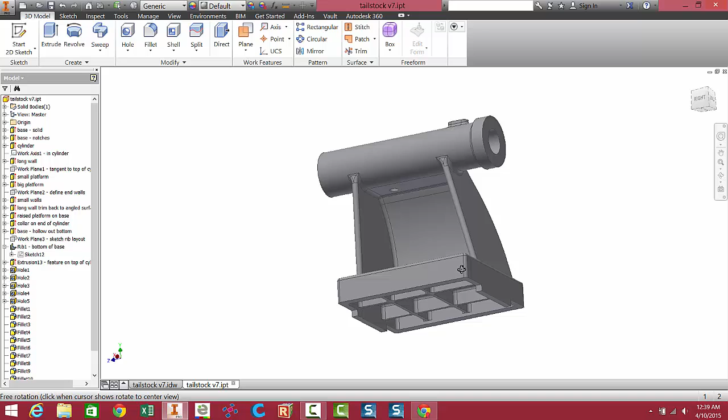This is going to be a real quick overview of the Tailstock version 7 part. First, let's take a quick look at this part in 3D orbit. Now you can see some of the features.

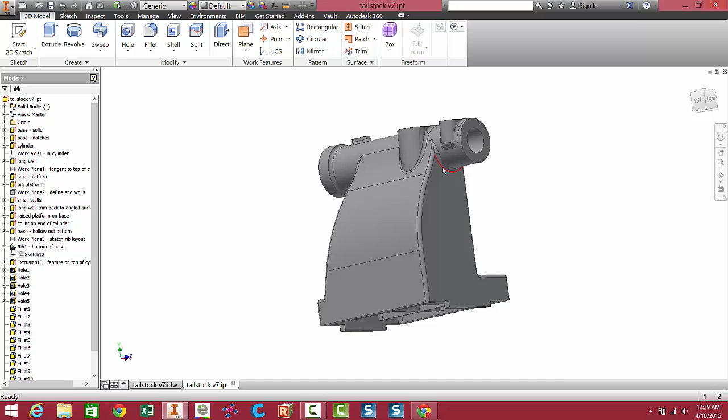A bit closer up view of those two platforms to the side of the cylinder. Just like that. So let me now simply rewind the part so you guys can see the order I made everything in.

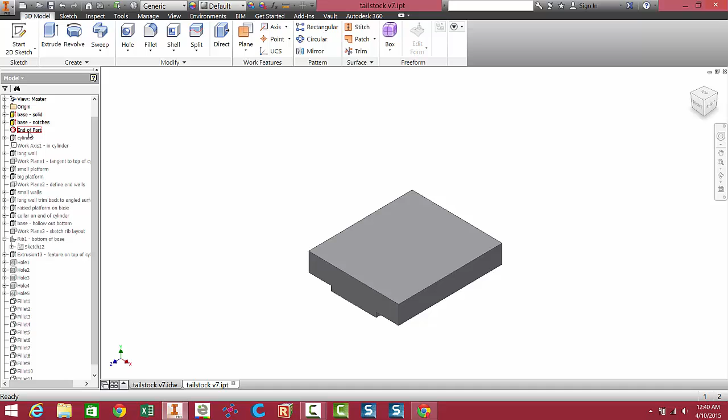I started just with the base, real simple. Then I cut away at the base to create those notches. Then next was the cylinder way up top. The cylinder was created by sketching on this end surface and then doing an asymmetrical extrusion.

Then I placed a work axis down the cylinder. Referencing the center of the cylinder will come in very handy in other sketches. A work axis is done by going up on the ribbon and clicking on the cylinder, and that'll put a line right down the middle.

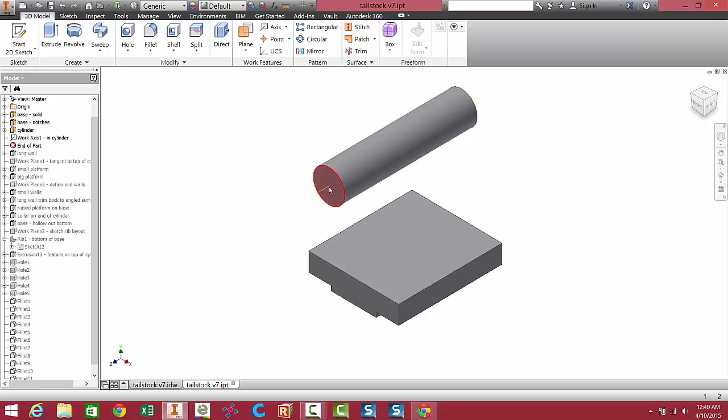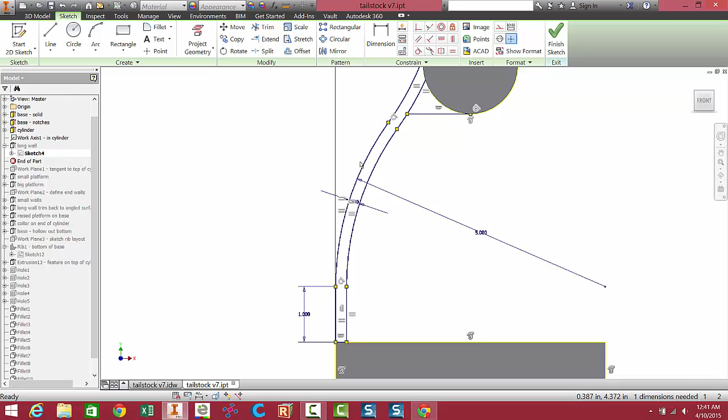Then next we created the long wall, and that was with a sketch on the end of the base. Do the left side first. Let me F7 so I can slice it. Yep, do the left side first.

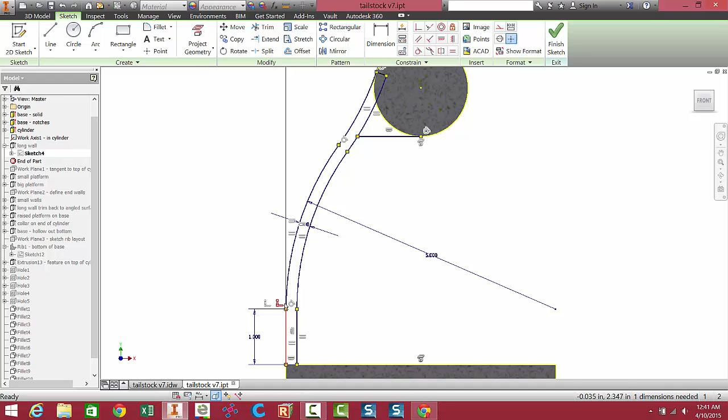Offset over to the right, close off the end with a little line. Make note it's tangent. This left line is a straight vertical line, an arc to the right, and then an arc to the left with tangent at all those points. Then offset to the right, and don't forget to put this little horizontal line that's tangent from the bottom of the circle and just comes over here to that intersection.

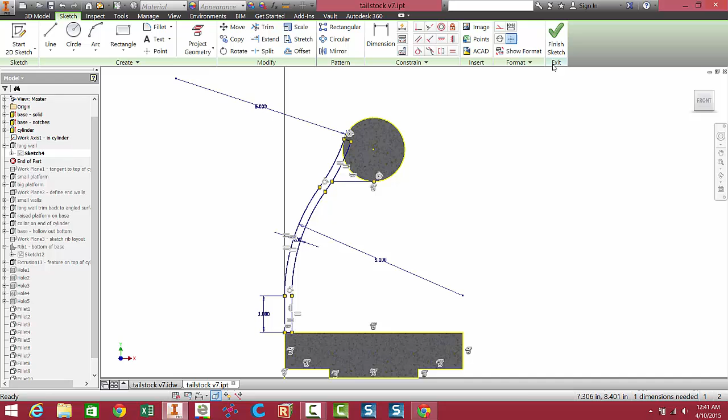And then we just extrude it to the other end of the base. I put a work plane in on top that's tangent to the top of the cylinder.

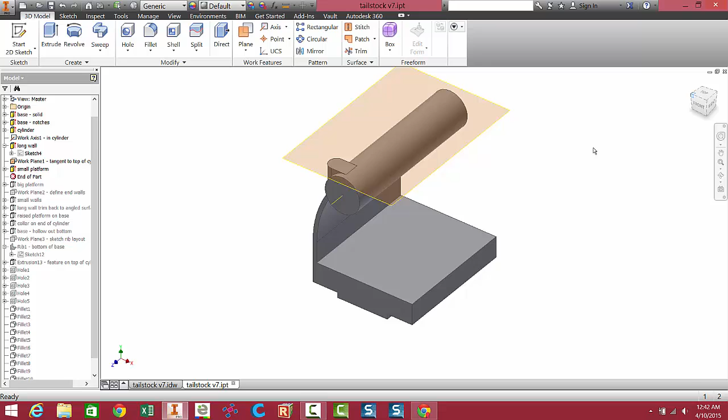Then I start creating these little platforms that come off to the side here. See that one? Just an example of what the sketch might look like for that. There it is. So we have how far out the center point is, how far in on the cylinder it is, and what the radius is.

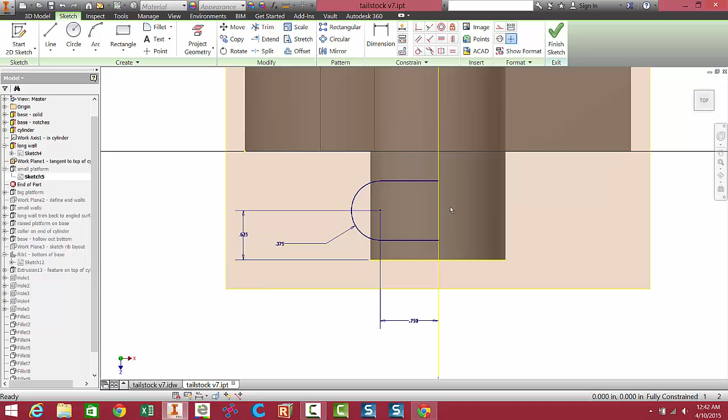And again, this sketch is tangent to the top of the cylinder because that's where the work plane is. And then we just simply extrude it down along the side. Next we'll do the bigger platform, and that just extrudes to the next feature, just blends in there.

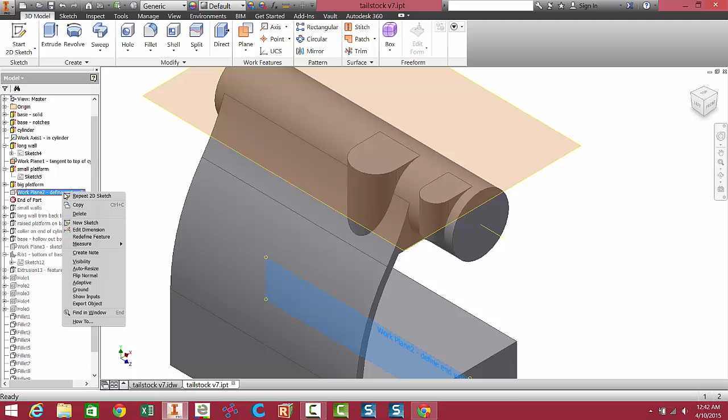We're going to place another work plane down here on the base, and that is so we can sketch on that and create these two smaller walls, and they have sketches that look like this. We hit F7.

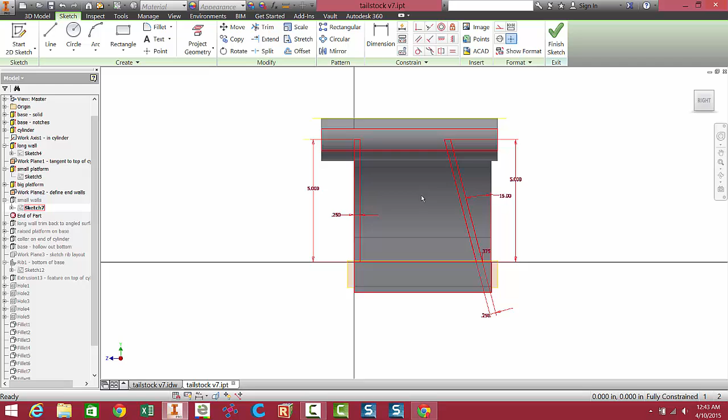Special thing to note on this is when you're drawing these rectangles, go up inside the solid part of the cylinder. That way we get them to blend together correctly. Same thing here. This side I think I drew with a rectangle tool. This side I had to use the line tool and then just use parallel to get these two lines parallel.

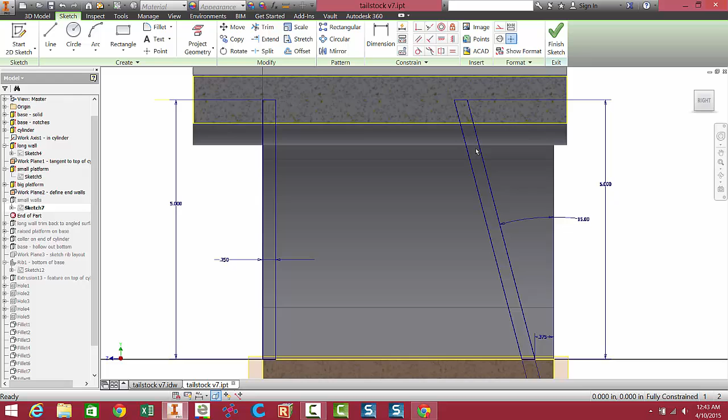The distances I just put in there to make sure the height was controlled and never shortened up on me. Also note down here how far in the wall is from the end. And this side is also 1/4 inch thick.

And then once you get them drawn, you just extrude back to the next feature. What I mean by that, just making sure right there it says to next. It should just extrude, that way you get a nice junction between the curved wall and these straight walls that you're adding.

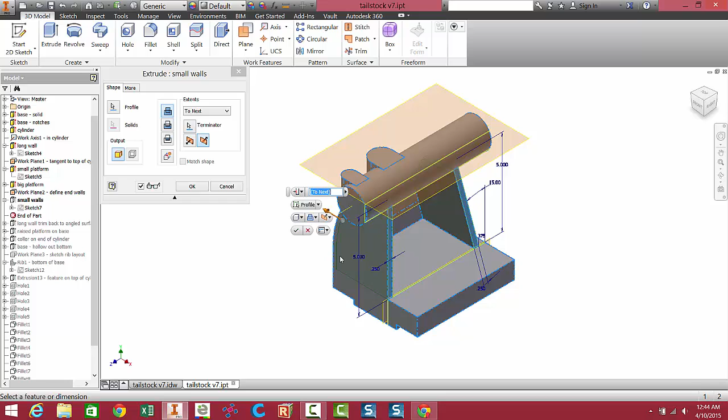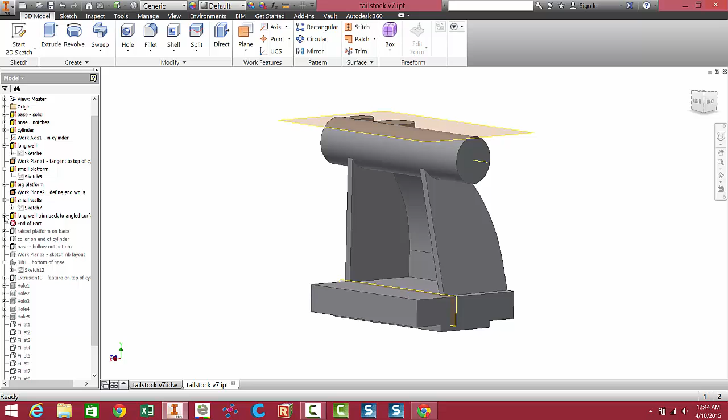Then next we need to trim off this overhang back here, like that. And to do that, you actually just put a sketch on the end of this surface here. And once you do, all you have to draw is this little line down at the bottom to connect to close this profile in.

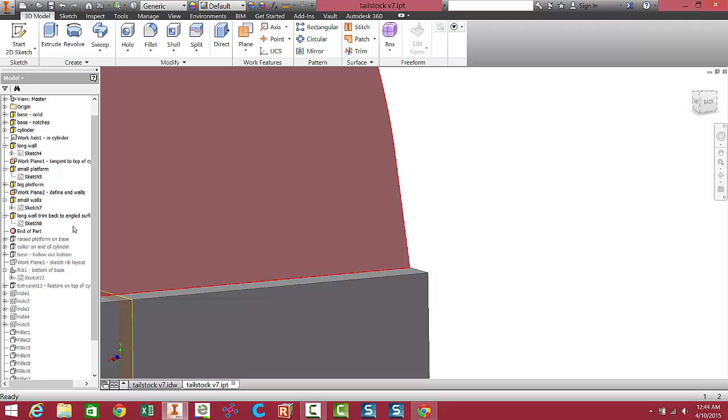And then you do an extrude cut to, and you have to select, when you say To here, you actually have to select that angled surface so it knows how far to extrude cut in. It'll just follow that surface then to cut away at an angle like that.

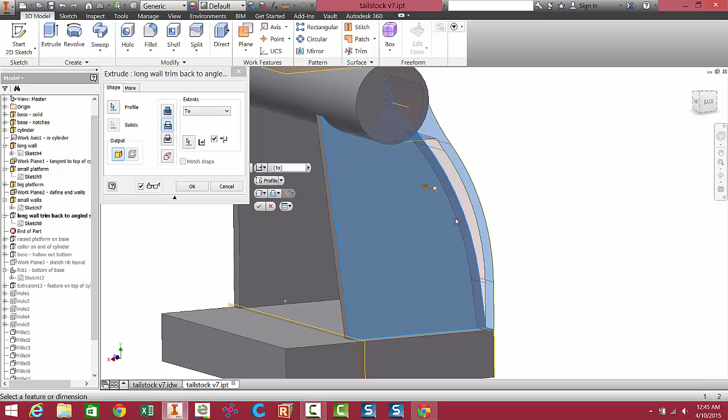Let's get back to a little easier features. We're going to drop a raised platform on the base there. Just sketch right on the top surface, extrude up.

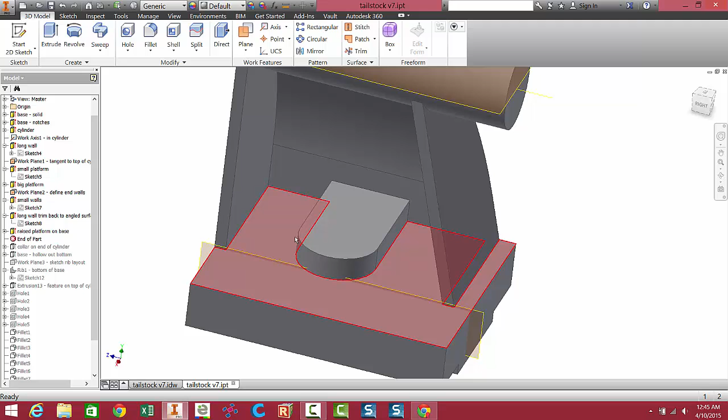Collar on the end of the cylinder. Let me shut this back off for the moment. So what I did there, in case we missed it, the cylinder's all one size.

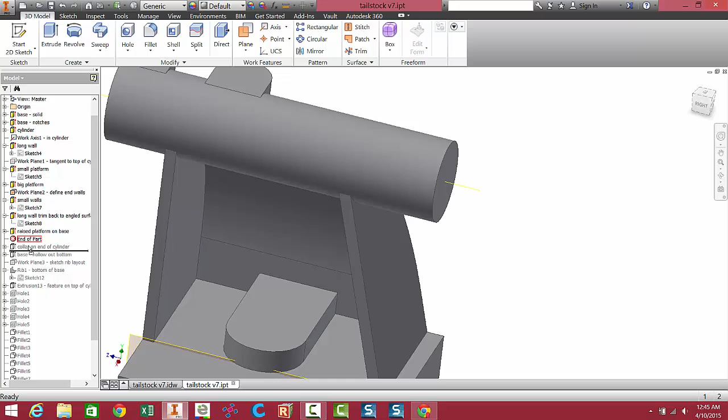We sketch on the end of the cylinder, add another ring a little bit bigger, and thicken it down there. Then we're going to work on the bottom a little bit. Need to hollow that out, so create a rectangle shape with the proper wall thicknesses, extrude up in.

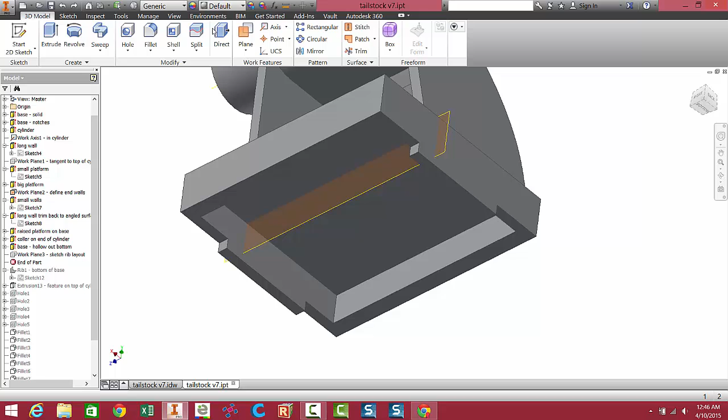We add a work plane. I used the plane tool, so I'll demonstrate that actually. Plane tool, left click hold, drag it down, and you'll see how that's coming down from the ceiling of that hollowed out area.

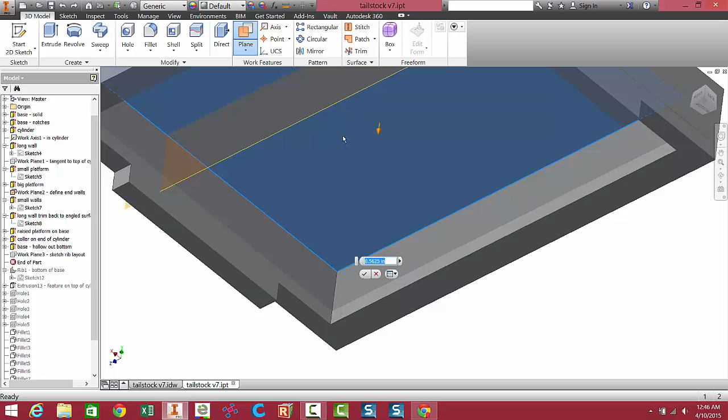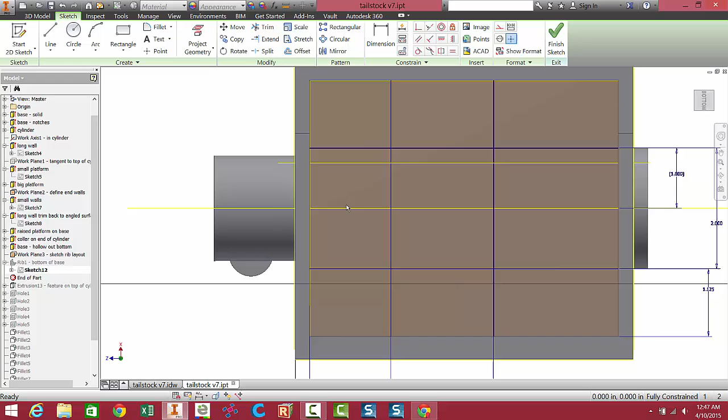Then look for the appropriate distance measurement on your drawing. This is not the appropriate distance at the moment. Once you have that work plane placed, a little bit of discoloration so we can see about how far down my work plane is. We are going to put a sketch with just simple 2 lines horizontally, 2 lines vertically.

You can probably see all my dimensions right there. And then use the actual rib tool to create the ribbed area for structure and strength here underneath.

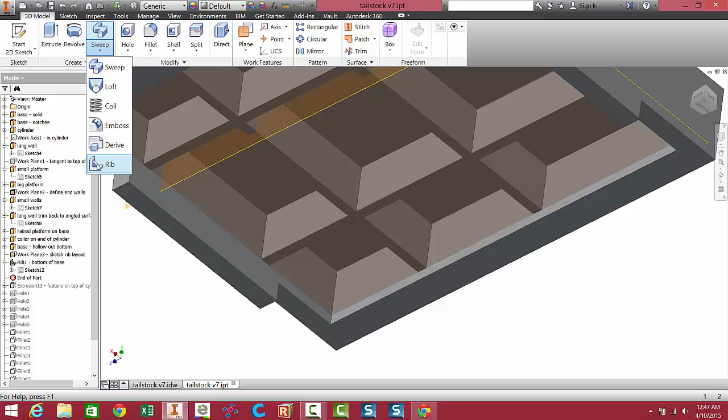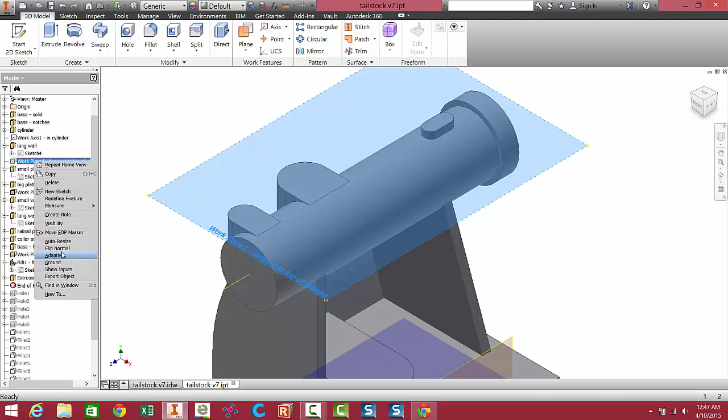Let's see, after that, a little feature on top here had to be put in, and that was by actually turning back on my first work plane that was tangent to the top of the cylinder. I could sketch on this, drew that slot shape, extruded a little bit down, appropriate distance up.

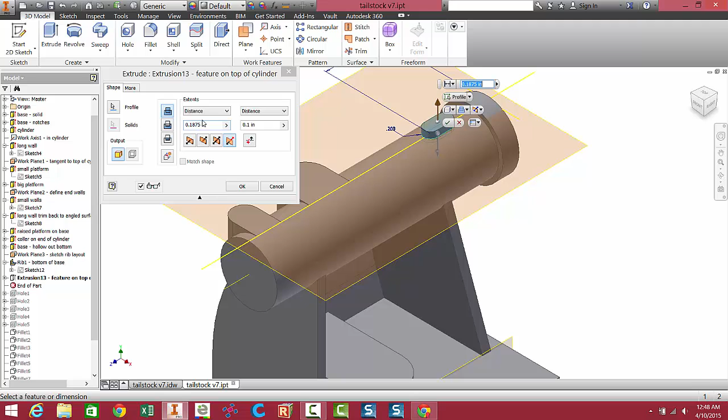Pretty sure it was asymmetrical. It was. So the 0.1 down is just to make sure there's something joining the cylinder below, and the 0.1875 up is the actual distance up we want.

Shut that back off. Shut off some of these work planes for the moment. Right there. Shut off that work axis.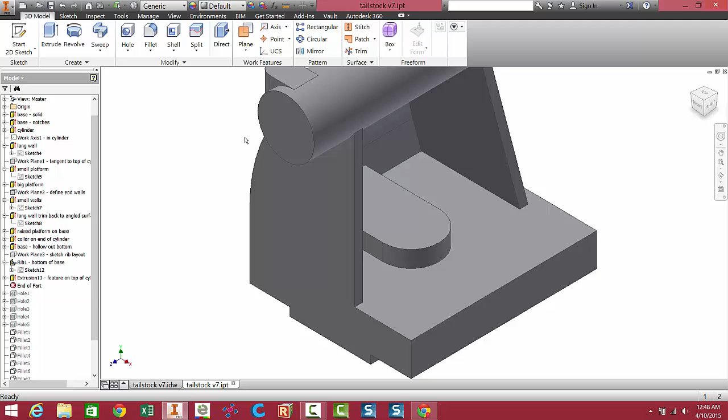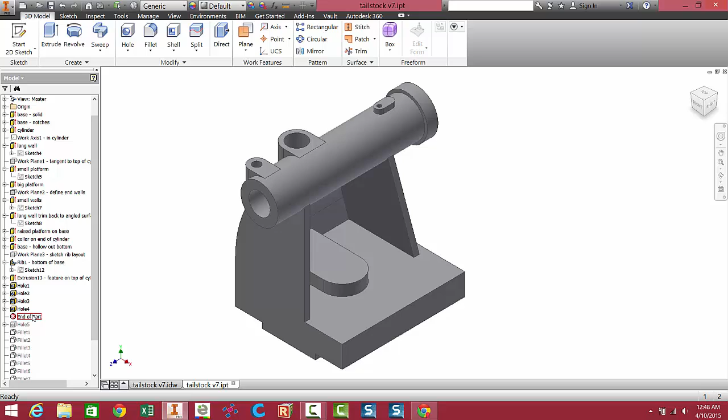Okay, once I have the solid part done, now you can start looking at adding holes that go through the parts or the features. There's that one, and there's 5 holes that have to be done: 1 on the cylinder, 2, 3, 4, and 5 down here below.

And after that, it is a lot of fillets. So I'll hover here for a minute so you can see all the highlights. Maybe I can rotate that a little bit better. Hover again — that was my first group of fillets.

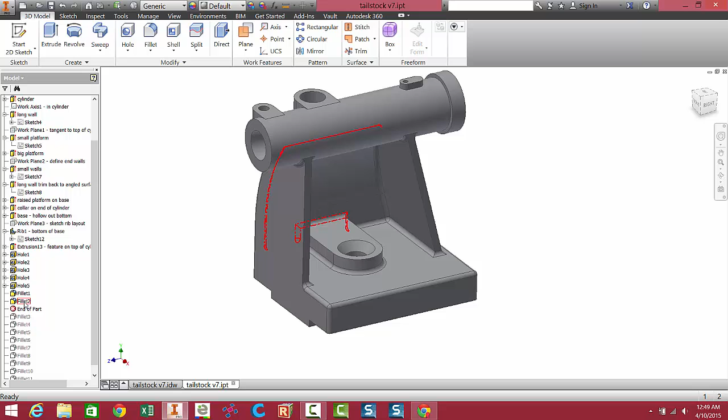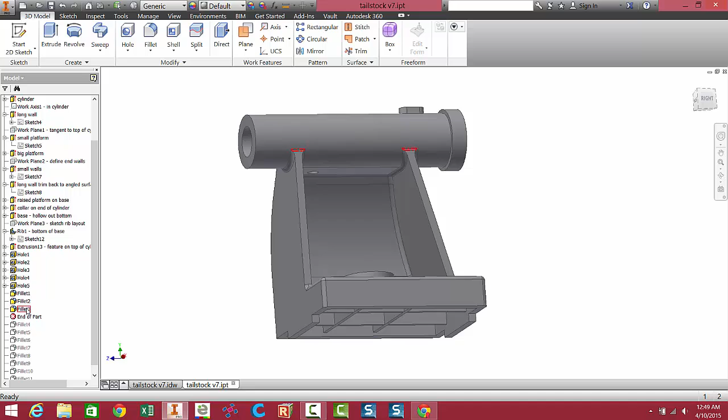Here's my second group of fillets. I'll try to turn that. And then third group, just those two little front ones. Don't forget you can pause this anytime to look at that more closely. There's lots of fillets on this. And then on the front, kind of rolling the end over. By the way, all fillets are 1/8 of an inch, 0.125.

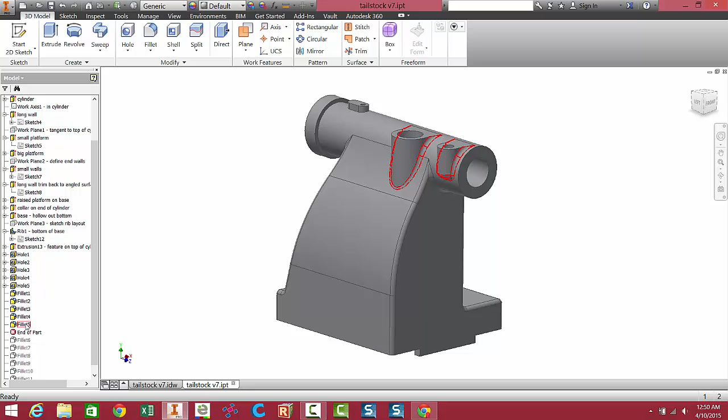Let's see, next group: back on the small platforms over here, so we're going to fillet those edges. Fillet around that feature on the very top, just where it meets the cylinder.

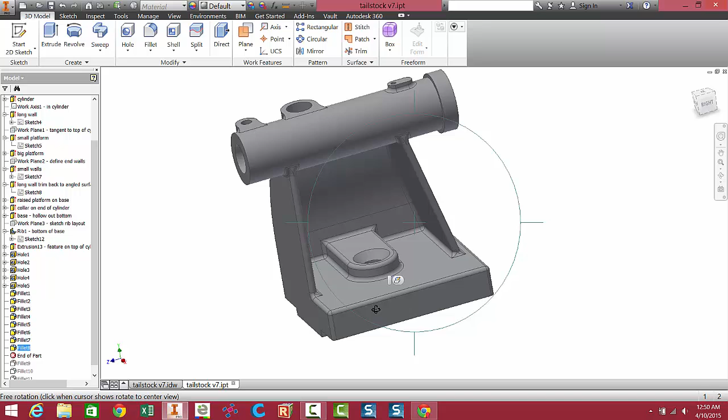Little raised area on the base needs some fillets. These fillets here are all underneath in the ribbed area. So I got one group that just does the hollowed out area first, and then I did a group of fillets that went all around the ribs, and then even those 4 little corners there.

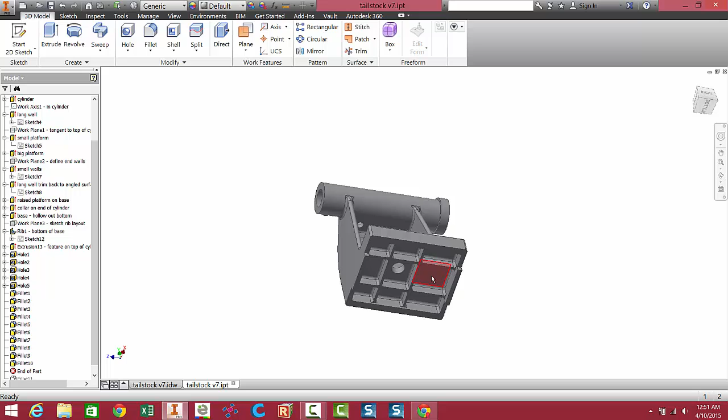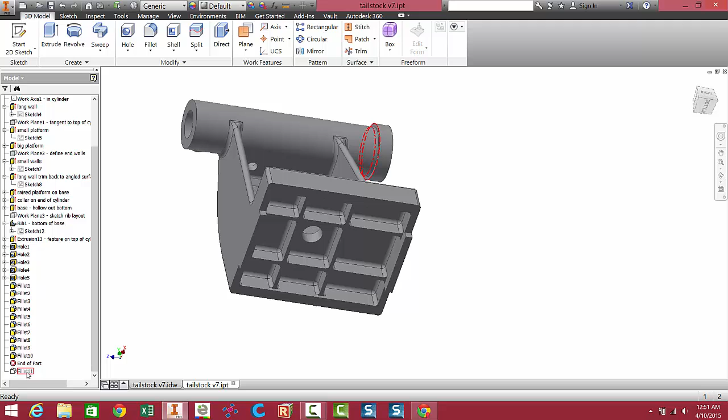So the only thing that's not filleted underneath here is this bottom surface — it doesn't have any edges that are rolled over up into the part. But as you can see here, all the other surfaces get fillets. Just one fillet left, right there on the cylinder — we put a fillet there as well.

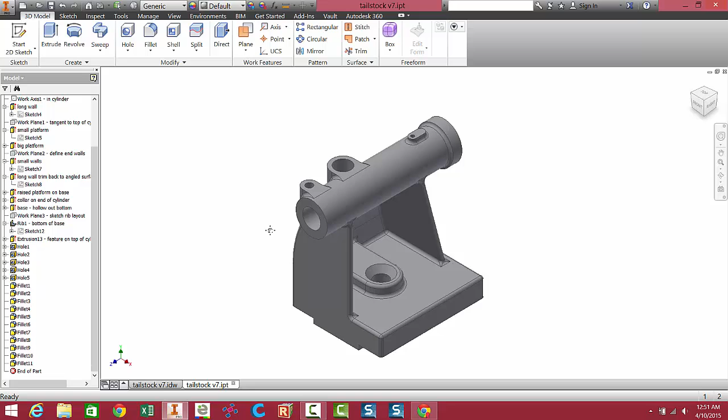Okay, so a little overview of that part. Hopefully the order will at least help you, or point you in the right direction on which features to make in which order, and hopefully lead to more success with this part. Good luck.